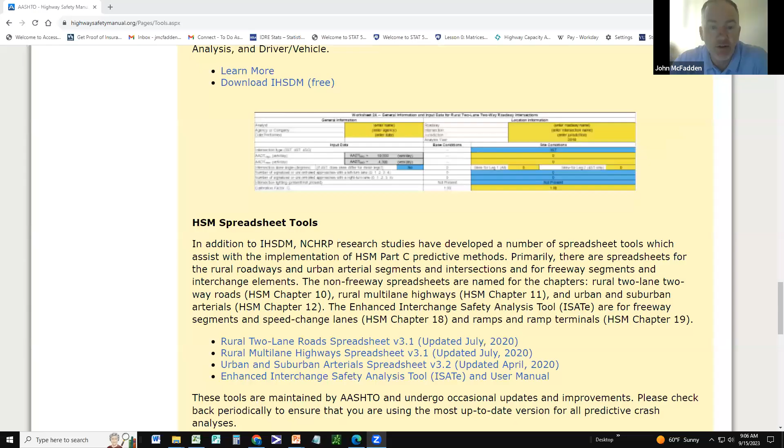If you recall yesterday, I went to the highwaysafetymanual.org website, and under tools, you'll end up at this location where we see Part A of the HSM, which is more or less an introduction into highway safety - the idea of traffic crashes being random events that are a result of system failures between the driver, vehicle, and roadway factors, basically setting the groundwork for why there's the need for a tool that estimates the interrelationship that exists between geometric design decisions or treatments that we put in the roadway, and the corresponding effect of those decisions on crash risk. Then we get to Part B, as I mentioned yesterday, which involves the roadway safety management process.

In the Highway Safety Manual, as part of it, they reference a few different resources. The first is AASHTOWare Safety Analyst. This was a pooled fund study, an NCHRP study that developed a software tool to help with network screening, diagnosis, countermeasure selection, economic appraisal, priority, and evaluation of those countermeasures. It is not the only tool that exists. Many states have adopted their own tool to deliver the HSIP process and help with that delivery. There's a handful of states, let's say 5 to 10, that participated in this and developed this Safety Analyst.

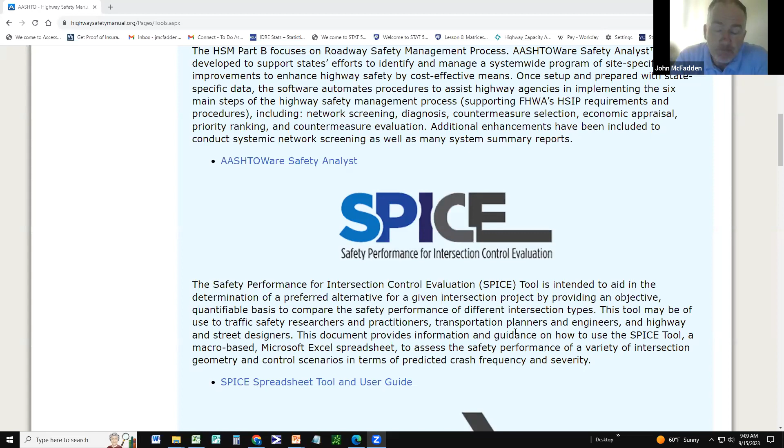So you'll see a couple other tools under this Part B roadway safety management process. We have the SPICE tool and CAP-X. SPICE is for intersection control evaluation, examining the safety performance. CAP-X is the capacity analysis for junctions, so it's relative to what we're talking about in the context of this workshop. VDOT has a junction screening tool called VJuST that's also shown on the site.

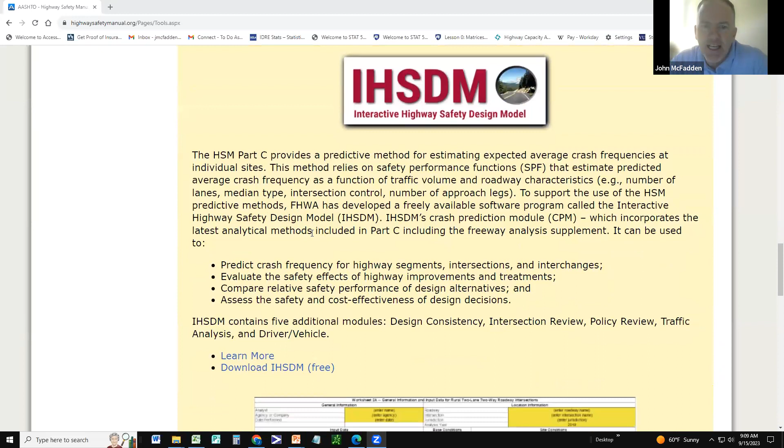But that is the Part B component to the Highway Safety Manual. We are focused on Part C, the predictive methods. As part of that, you'll see IHSDM at the top on the highwaysafetymanual.org site, and additionally we have the spreadsheet tool.

So today we're going to talk about, for freeway analysis, the Enhanced Interchange Safety Analysis Tool, or ISAT-E. And if you have the ability and didn't do it yesterday, this is an opportunity. If you click on that link there, it'll take you and deliver...

When you download it, 2 files: one is the Excel spreadsheet, the other is the ISAT-E user manual. And if you were to open up that user manual, you would see this is kind of the instruction set for how to apply DDSA to a freeway ramp or ramp junction using the NCHRP 17-45 methodologies.

And it does a pretty good job at teeing this up. In fact, when we deliver this workshop in person, we walk through step by step each of the data elements necessary for the delivery of a predictive analysis on a freeway ramp or ramp junction, and maybe even more importantly, the implication of when and where it's appropriate versus when and where...

There's some limitations with this methodology. So I love the fact that there's a kind of set of instructions, even though if I ever went and bought a piece of furniture at IKEA, the first thing I do is throw the instructions out and just try and put the thing together. And about an hour or two later, after frustrating myself, I'll go back and look for the instructions. So part of me thinks sometimes the best way for me to learn is to just jump in and play around with the software and get lost and make mistakes. And then I'll come back once I become frustrated enough to the instructions and actually walk through in a systematic fashion.

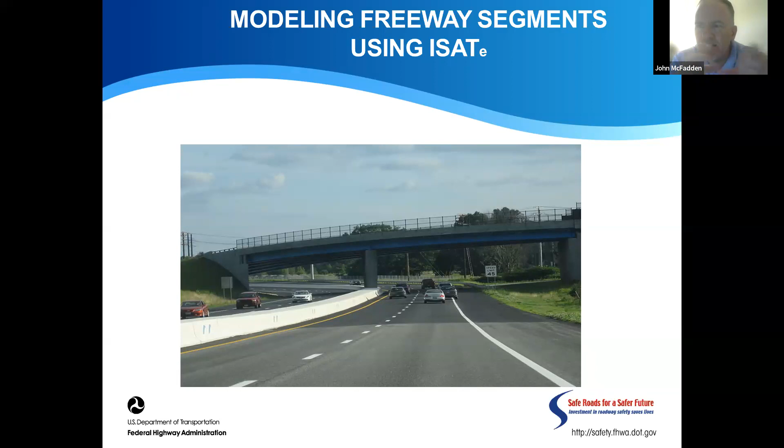So there are 2 other PowerPoint files that I would typically go through, the freeway ramps and ramp junctions. These 2 PowerPoints will also be emailed to you later today. And hopefully I can get through some of them, but I'll go as far as I can with respect to ISAT-E. I do believe, though, once you see how we apply this to freeway segments, you'll start to understand conceptually the logic of ISAT-E, and when switching over to ramps or ramp junctions, it's not going to be as much of a challenge because you're just going to be applying the same type of logic here.

So what we want to do this morning is describe the modeling steps, describe segmentation and how to do good segmentation, and then examine the data inputs necessary to do data-driven safety analysis using the Highway Safety Manual on freeway segments.

So I showed you the ISAT-E user manual, and yesterday I also showed you the NCHRP 17-45 final report. Those 2 references in combination with the Excel spreadsheet can all be downloaded for free and basically allow us, regardless of whether we own the Highway Safety Manual or not, to apply the concepts of data-driven safety analysis using the methodologies within the highway safety manual.

And basically deliver an analysis that we can make a more informed investment decision about our project.

So we showed this slide yesterday, and I had mentioned the idea of what we're doing with the HSM predictive methods. We are basically taking samples from states on roadways of different functional facility or functional classes or facility types, and producing a model that is an estimate of a population parameter for prediction of crashes using different predictor variables.

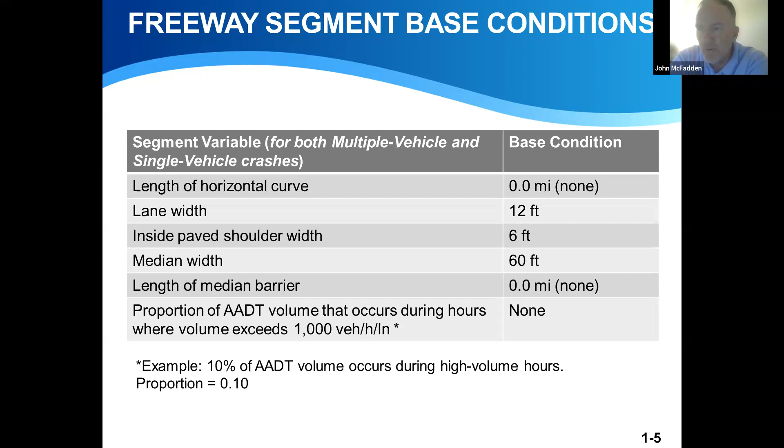Okay, for ramp entrance and exits, the base conditions are shown here: horizontal tangent, 12-foot lane widths, inside shoulder width of 6 feet, median width 60 feet, no barrier, and the proportion of AADT volume that occurs during hours where volume exceeds 1,000 vehicles per hour per lane is not occurring. So we are in an uncongested scenario.

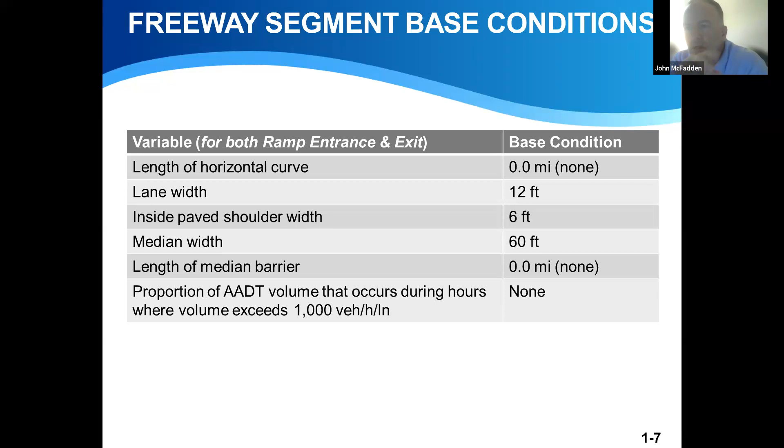And we know under certain scenarios there may be overlap, meaning if I'm dealing with a horizontal curve, lane and shoulder width may have some influence or overlap. If I correct for a horizontal curve and I widen the shoulder and lane width around a horizontal curve, the CMFs associated with that, if we didn't control, could double count. What they're indicating in the research is that they did calibrate this so that they work in combination to be compliant with that assumption of independence.

Let me scroll out. Hey Gary, I see you wrote a question here. In one of the analyses we recently reviewed, had a minimum speed limit on the ramp section set to 50 miles an hour, but our project had a speed limit of 35. Is the speed limit range hard-coded? Thank you, it's a good question.

Speed, in terms of the Highway Safety Manual, is incorporated into a couple of the facility types as a direct predictor variable, but not many. You may ask, well, how can this not be? It comes up a lot when delivering this training. How do we not incorporate speed into this analysis for some of the methodologies? The short answer is, when they ran the models, the data tells us what the data tells us. So they put speed limit in there, and it just didn't rise to the level of statistical significance to be included in the model.

I'll speak parenthetically here. If you look generally at other research examining speed as it relates to predicting or explaining crash variability, speed itself, or speed limit, as far as I know, hasn't been highly correlated or found to be a statistically significant predictor in explaining crash variability. But variability in speed was found in research to be correlated with crash risk. So it's not so much the speed itself, but variability in speed.

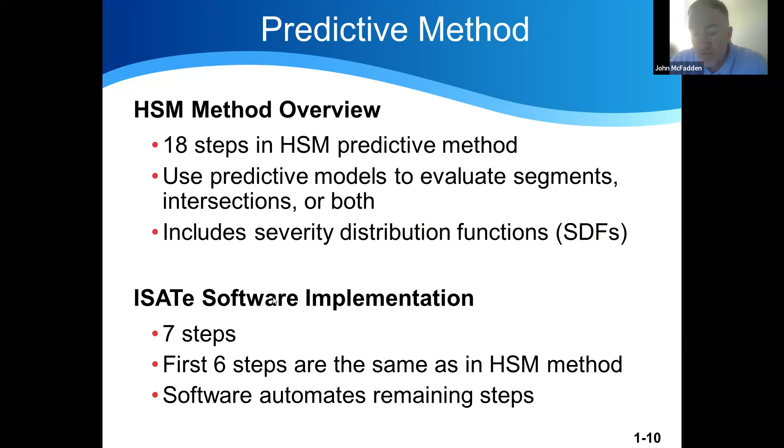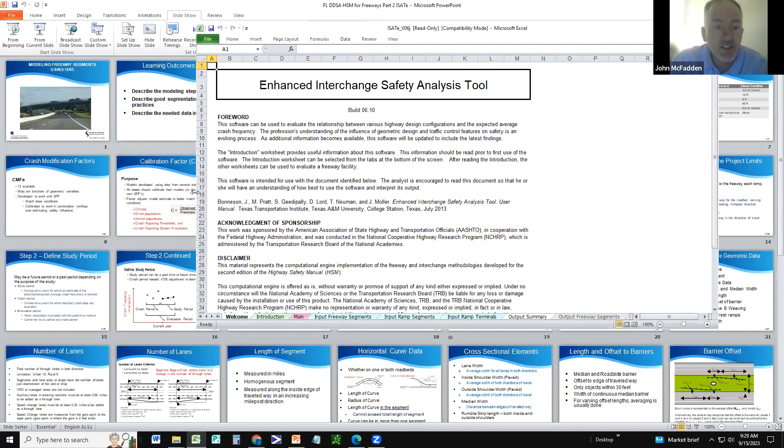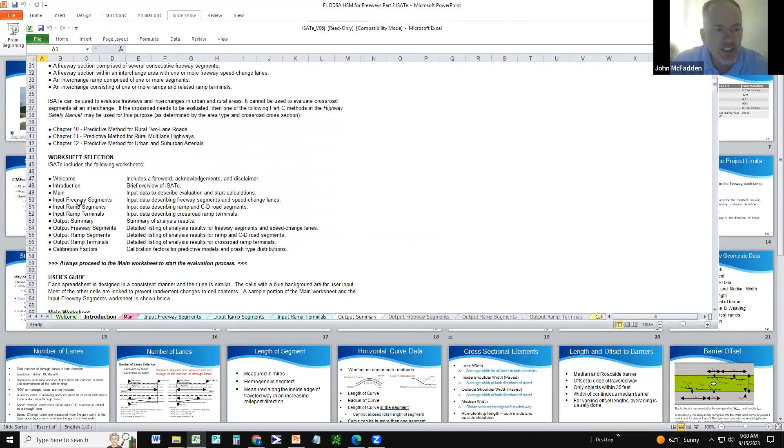Across the bottom of the ISATe spreadsheet you see the different tabs. I'm at the welcome tab, and I'm going to scroll over and click on the introduction tab. Here they walk you through the Highway Safety Manual philosophical approach, the methodologies, the facility types that can be used, worksheet selection, and so on, giving you an intro into ISATe and the different data elements and pull-down menus.

The other thing I want to share is this tab, the input for freeway segments. Before that, you have the main tab that gives your specific project descriptive elements, which you plug in regardless of what facility type you're looking at. Today we'll focus, initially, on freeway segments. Let me come back now to the script.

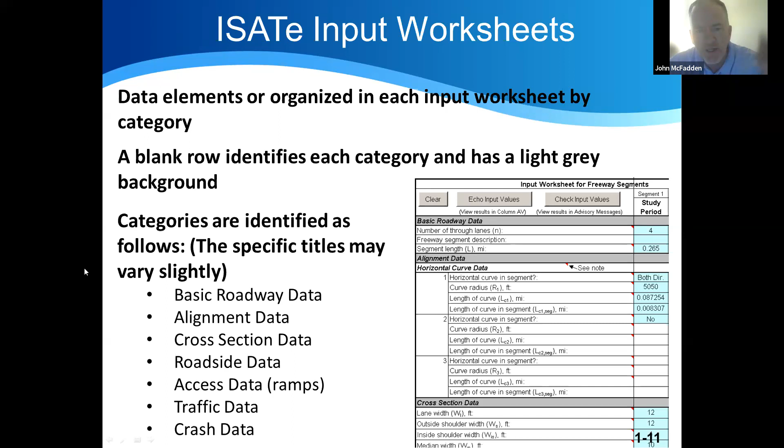Now what you see on this slide is a cut and paste image of the input worksheet for freeway segments. As shown on the bulleted list, it starts with your basic roadway data, then asks specific questions about the context of your facility, number of through lanes, segment length, then alignment data, cross-sectional data. As you scroll down you'll go through each bulleted item: roadside, access, traffic, and crash.

The 7 steps involved in this process: first we define the project limits, then the study period. We need to acquire traffic volumes and crash data. I should preface this discussion - there are critical data elements necessary to run these models. You can get away without a complete inventory of data for your project; you can make some assumptions, but they're rooted in the primary data variables necessary to run this.

If you don't have traffic volumes, there really is very little you can do, because the foundation of these models in the SPFs involves traffic exposure, traffic volume, and segment length. The other geometric variables are also crucial for each of the CMFs associated with those elements.

So capturing traffic volumes and crash data is critical; geometric and traffic control data is critical; and dividing the project into individual sites, which by definition is segmentation, is also critical for our analysis. Once we've done that, we can take our observed crash data and assign it to those individual sites or segments we created. Once we've put all this into the Excel spreadsheet, we can run the analysis and get the results.

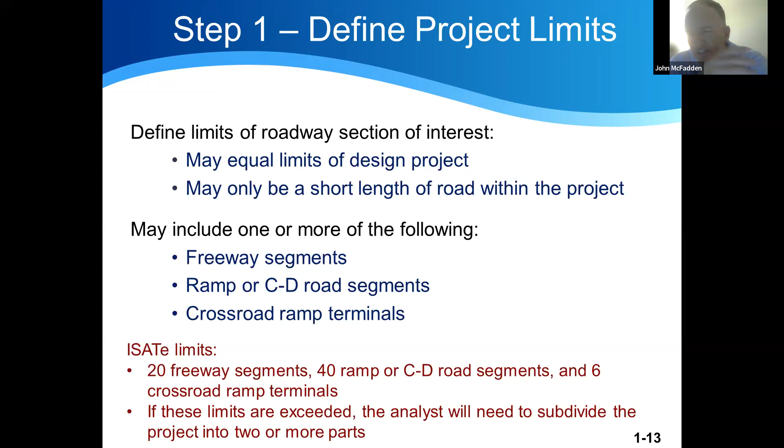You may be interested in just the freeway segments, just a ramp or CD road, or just a ramp terminal, or you may be interested in the full project that includes all three or some parts of all three. If your project is large enough, let's talk about the boundary or limit of ISATe. The limit of analysis that ISATe can do in any one file is 20 freeway segments, 40 ramp or CD road segments, and 6 crossroad ramp terminals. If you exceed that, you'll have to separate it into multiple files.

Okay, now again, setting this up, defining the project limits. First, we need to establish a reference line for the freeway, for each ramp, and for the CD road. For freeway segments, typically what's used is the inside edge of the traveled way for the roadbed serving traffic moving in the increasing milepost direction. For ramps and CD roads, we use the right edge of travel way in the direction of travel.

Okay, defining the study period. The study period may be a future period or a past period, depending on the purpose of the study. These are consecutive years for which an estimate of the predicted and expected crash average frequencies is desired. Our crash period are the consecutive years for which reported crash data are available. The evaluation period are the years separately evaluated with the predictive method, and this combines both the study period as well as the crash period. This language is embedded in the HSM and in the NCHRP 17-45, and it's important to be aware of these three time periods we are using in the analysis: study, crash, and evaluation.

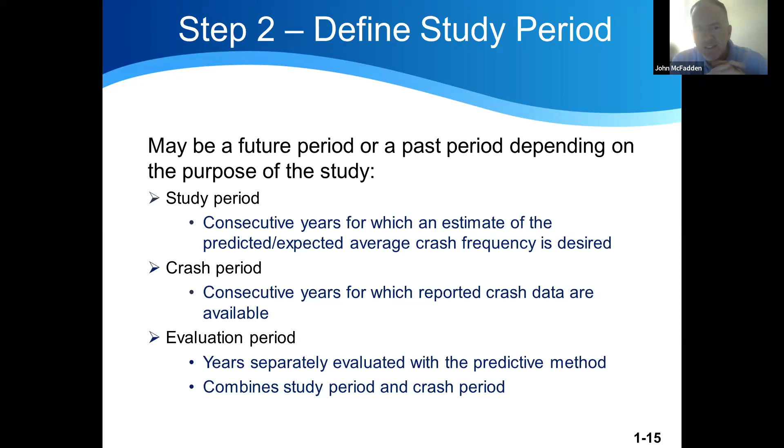Let's see, is there a question here? Oh, okay.

Moving forward, now we're building this house of how to do this analysis. Let's get into the data requirements. These are the traffic volume and observed crash data. All of the volumes are AADT, in vehicles per day. The mainline AADT for each segment, this is bidirectional, or both directions of travel, is required. So too are the upstream entrance ramp AADT and the downstream exit ramp AADT. We also, based on that CMF on high volume proportion, need to identify the proportion of AADT volume that occurs during hours where volume exceeds 1,000 vehicles per hour per lane.

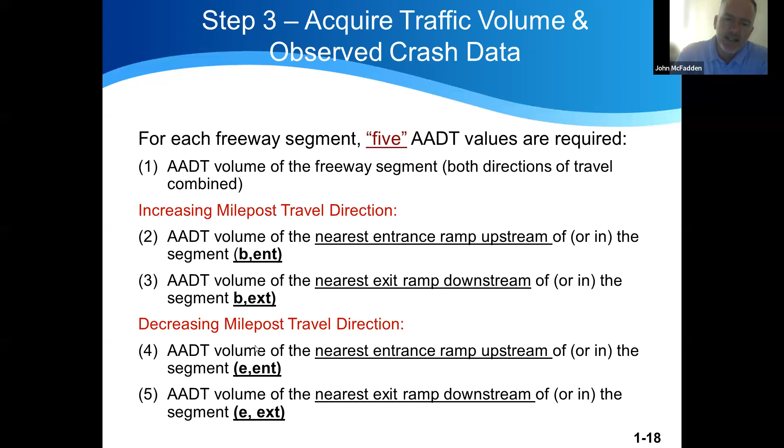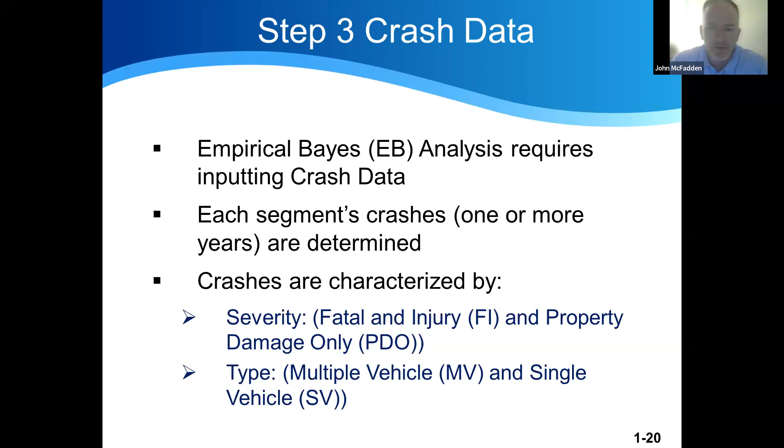Okay, walking through each of these individually, starting with number of lanes. These are the total number of through lanes in both directions. So the models are able to handle as many as, in an urban context, 10 total lanes. In a rural context, 8 total lanes.

A question that often comes up: what if I have 12 or 14 lanes? Then you would be extrapolating outside the bounds of the model. And as I mentioned before, it's hard enough if we do everything as the model intended, so misapplication or extrapolation beyond the intended bounds of the model is not recommended.

Let's continue here. Segments with lane adds or drops have the number of lanes just downstream of the add or drop. We do not incorporate HOV or managed lanes into this methodology in its current form.

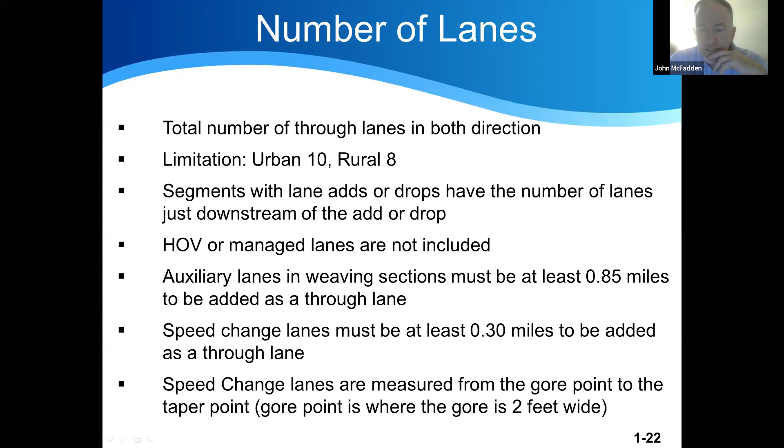Auxiliary lanes in weaving sections have to be at least 0.85 miles to be added as a through lane. And then speed change lanes have to be at least 0.3 miles to be added as a through lane. These speed change lanes are measured from the gore point to the taper point, and that gore point is where the gore is 2 feet wide.

Okay, now length of the segment. This is measured in miles. We're focused on homogeneous segments, so in cases where something changes that directly impacts the prediction, we have to subdivide into a separate section or segment. And it's measured along the inside edge of the traveled way in an increasing milepost direction.

Oops, we got a couple questions here. John, that high volume proportion, I believe it's just for the main line, and I'll confirm that. Derek's going to be here next week to help with the IHSDM. I'm pretty sure that high volume proportion is just for the main line.

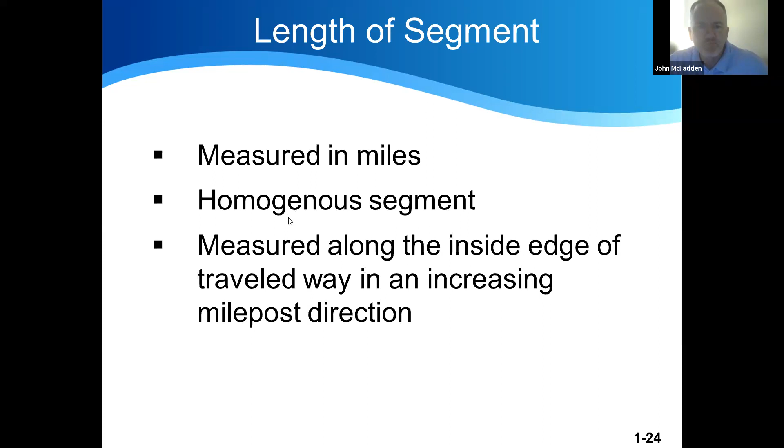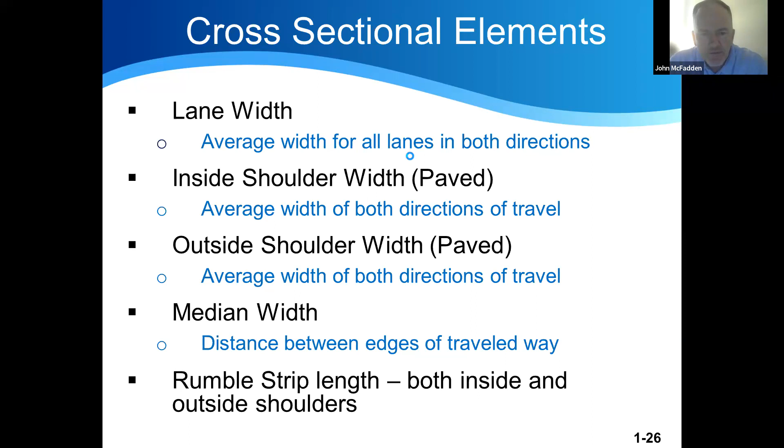Here is an example for barrier offsets. Each piece here is represented by its average offset, W sub off comma IN sub I, and length L sub IB sub I. We could alternatively recognize that the offset is the same for pieces 1 and 4, and 2 and 3. So each pair can be combined by adding the two lengths, L sub IB1, L sub IB4, and using the common offset length. You can average these things out and it will yield the same result. By simplifying it, it alleviates some of the data entry elements.

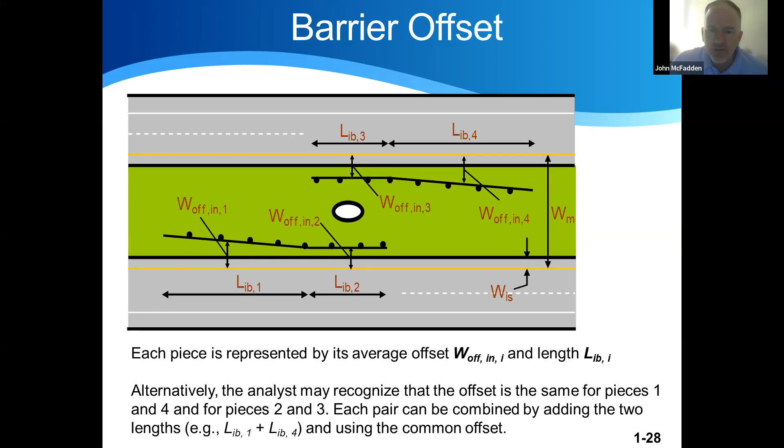We had mentioned type B weaving a few times - let's get into that for a moment. What are the characteristics of type B weaves? One of two weaving movements can be made without any lane change. The other movement requires at most one lane change. And then both exit and entrance ramps are on the right side of the freeway.

So how do we measure this length? It is from the gore point of the entrance ramp to the gore point of the exit ramp. If that length exceeds 0.85 miles or 4,500 feet, we do not consider this a weaving section - it becomes a lane add or a lane drop.

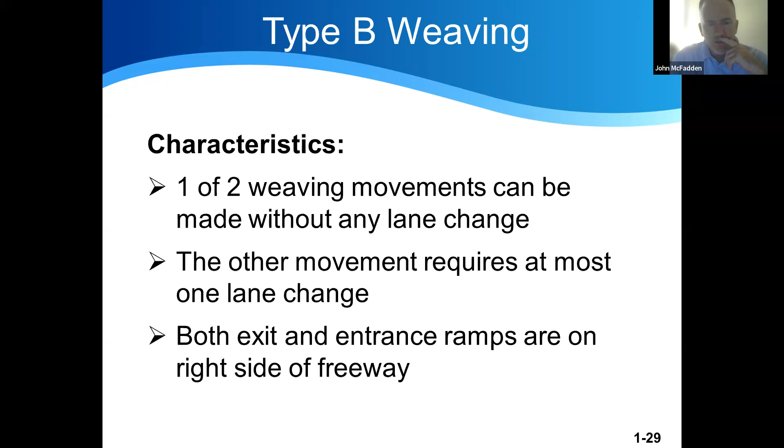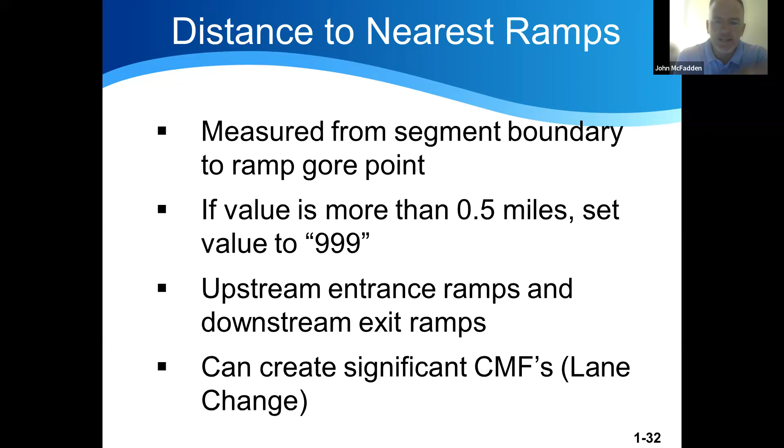Now we'll get into calculating the distance to the nearest ramps. These are measured from the segment boundary to the ramp gore point. If the value is greater than a half mile, we just code it as 999 - no impact on safety. The upstream entrance and downstream exit ramps are the ramps of interest, and this can create significant CMFs for lane change.

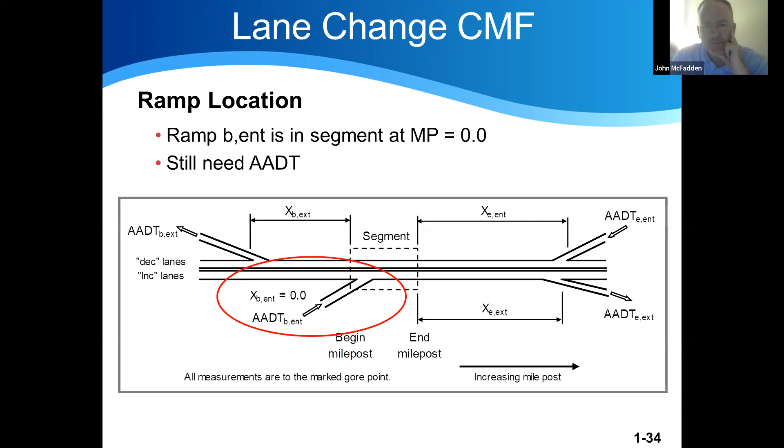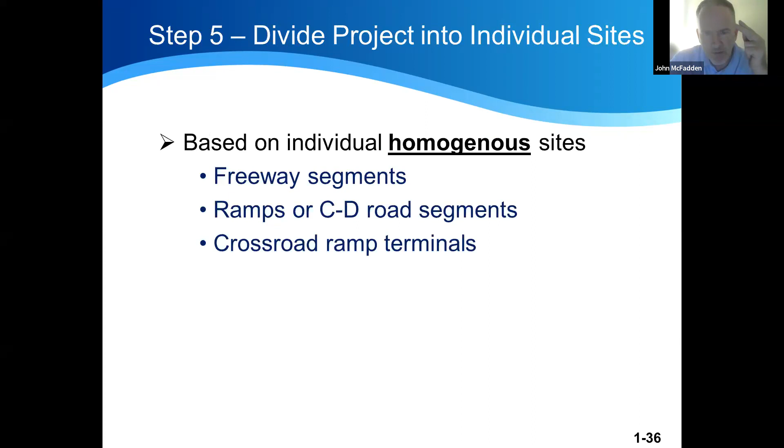Now step 5, we divide the project into individual sites. We're focused here on homogeneous segments, and these are based on freeway segments, ramps or CD road segments, or crossroad ramp terminals. This is critical for the proper analysis to be conducted. So when do we separate or subdivide our project into multiple segments?

Anytime we see a change in the following characteristics: traffic volume, number of lanes, lane width, shoulder width, median width, clear zone width. And what this should connect with you is the idea that these are directly linked to the predictor variables for CMFs.

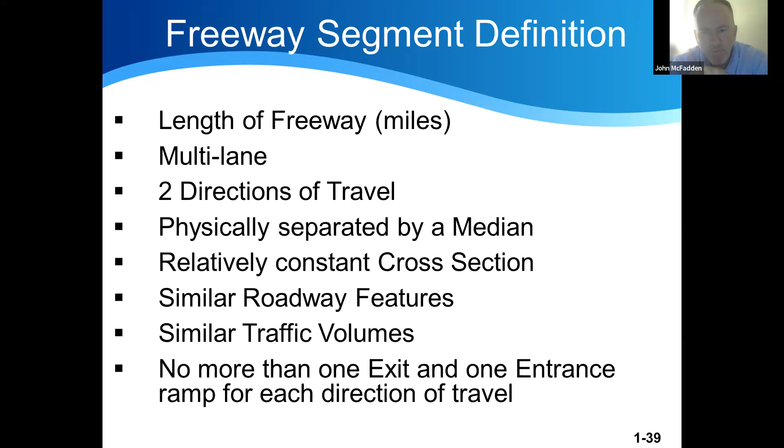So in setting up your analysis project, one of the key elements is defining the segments as a result of segmentation. Here we have an illustrative example of the segmentation process for a freeway speed change lane. You can see the ramp entrance length, the taper point shown, the gore point shown, and for the exit ramp with taper design, the ramp exit length, the gore point.

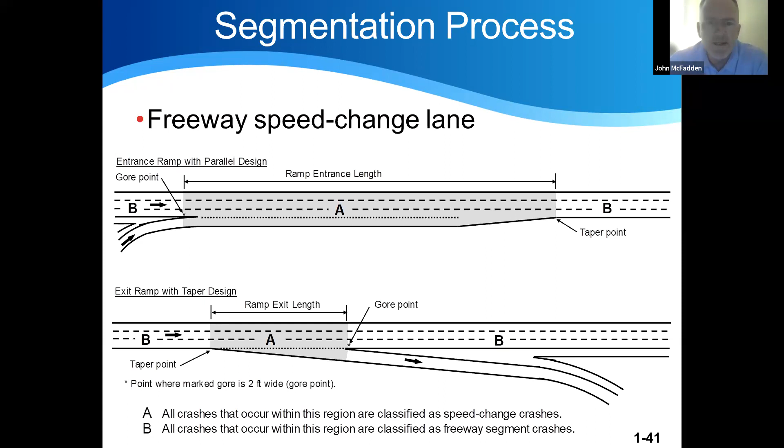When we start our segmentation and establish it throughout our project, then we're going to come back and look at the geospatial information related to our crash occurrences - the observed crash history - and place those accordingly in the different segments. Based on the type of segment we're dealing with, there are different models that will be used to predict those crashes.

I mentioned that you need geospatial data related to your crash data in order to be able to allocate the crashes at the specific locations within the segments that we've created. This can be a problem if you don't have that. If you just have the total crashes over the project limits, then we would have to basically use project level EB as compared to this site specific approach.

If you don't have the exact location of the crashes, then we're just allocating the crashes across the entire project. So that's site specific - crash information is not adequate to locate the crashes accurately within the segment.

For project level, the EB method, if many segments are short, conceptually relocate features defining segment boundaries to produce longer segments and the predictive model estimate alone. In this case, we are unable to do the EB for that project level because we cannot differentiate. So there are cases where the EB is either going to be a challenge or we have to make broad assumptions about the distribution of those crashes across the project limits, based on the level of location data related to the crashes that we have.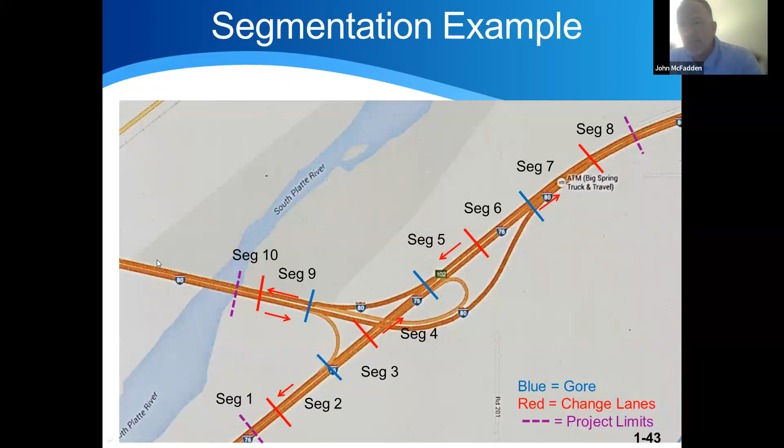With that segmentation, you've created a new analysis segment that requires the data to be input separately for each of those segments. I cannot impress upon you enough the idea of segmentation and its role in the prediction. There's a level of precision needed or required for us to get some sort of accurate representation of the results. A key to that for freeway analysis is the segmentation process.

So in reviewing this, one of the key elements here are project boundaries, segments, timeframes, the CMFs, the data inputs that we use, ADTs, lane change, speed change lanes, curves and barriers - that kind of captures modeling for the freeway segments.

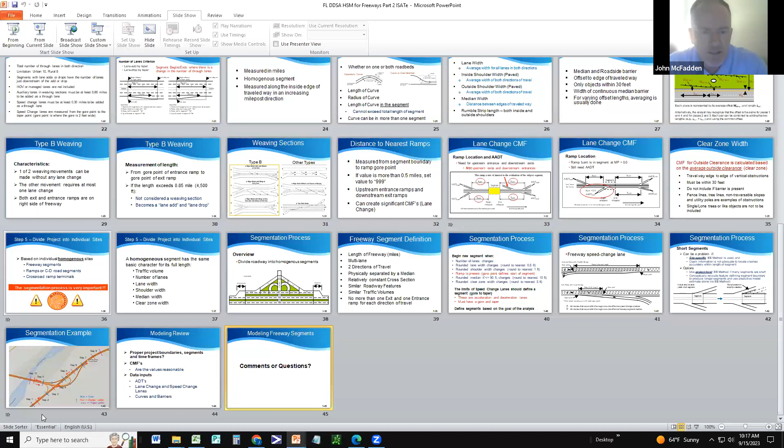So I want to just segue back to the spreadsheet for a moment and illustrate what this would look like. At this point in person, what we would end up doing now is a group project where we take - and I give you the example of I-76, and we've inputted into ISAT-E to run an analysis. I just kept the information from the downloaded file, and I want to share with you.

Initially, when you start off a new project here - and this is just the sample project - the first thing you're going to do under the main tab is establish the general information for the project. Then you're going to run through and identify the first and last year of analysis, and then the first and last year of crash data that you have available.

And then you can segue or identify, do we have data for this site? So we either don't have crash data for all segments combined, meaning we're basically distributing those crashes uniformly across the entire project because we don't have good geospatial data. Or we may have data for each individual section or segment available, where that geospatial location information related to crash history is available, and we can apply it to the different segments we created.

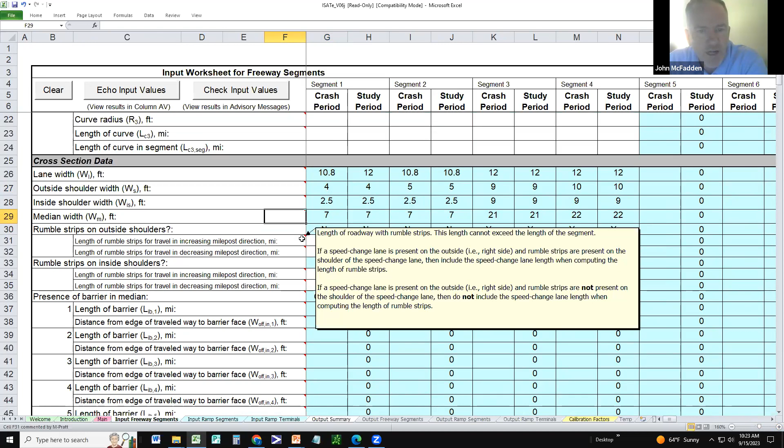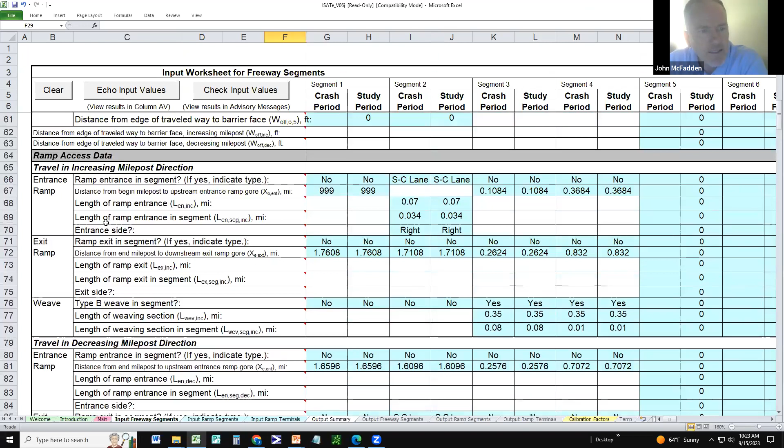Let me continue, make this a little larger here - maybe difficult to see. As I scroll down, you can see lane width, outside to inside shoulder, median width. Again here for median, click on the red triangle and it gives you more detailed information - rumble strips, inside and outside shoulders, median barriers, and the idea of the length of the median barrier. Roadside data, presence of barrier, ramp data, and increasing versus decreasing milepost direction, and then your traffic data.

Also the proportion of ADT in the average 24-hour day where the hourly volume exceeds 1,000 vehicles per hour per lane. So that lane volume per hour - the equation is captured there, where the volume during hour I, and N is the number of through lanes. You do that for each direction, increasing and decreasing milepost, you put the ADTs in. And if you just put one value, it will run that value continuously.

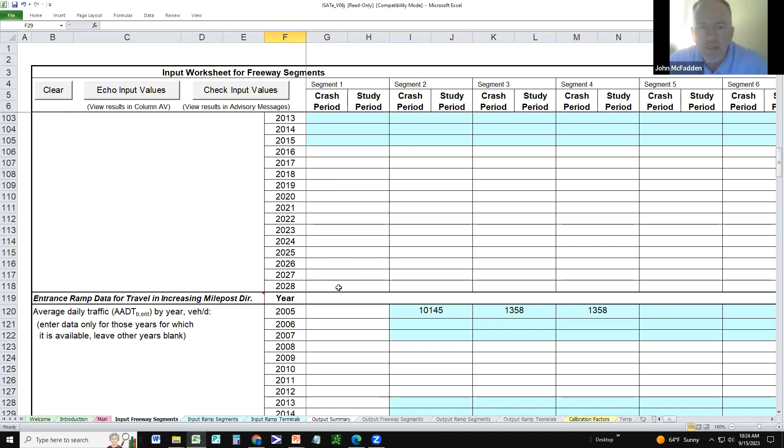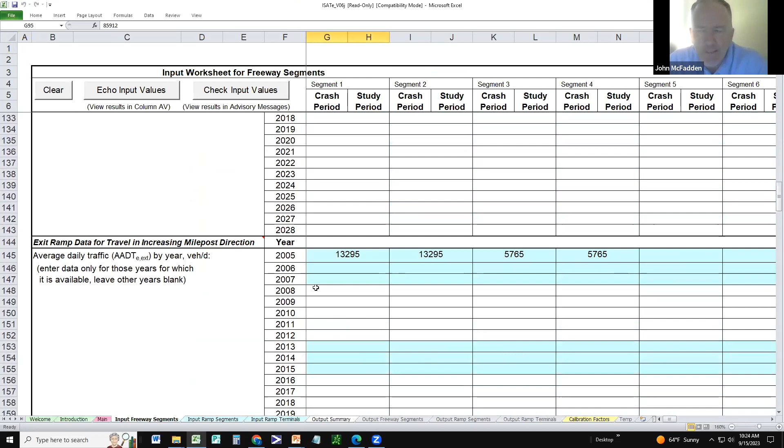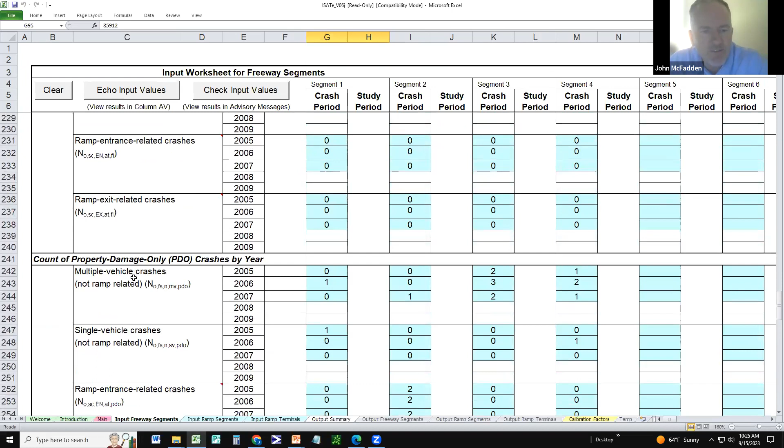If you put a value like 85,912 for 2005 and then 2028 - well, I should also go back. We've established our first and last year of analysis, or of crash data, and the first and last year of analysis, 2013 to 2015. So when we put in our traffic volume data, we have 2005 data, it will pull from that data and use it accordingly in the predictions if that's the only crash or volume data you provided. Scrolling down, there's the crash data again for the time period, broken down by multi-vehicle, single vehicle, ramp entrance, ramp exit, multi-vehicle, single vehicle, and this is fatal and injury versus PDO, and then any advisory messages.

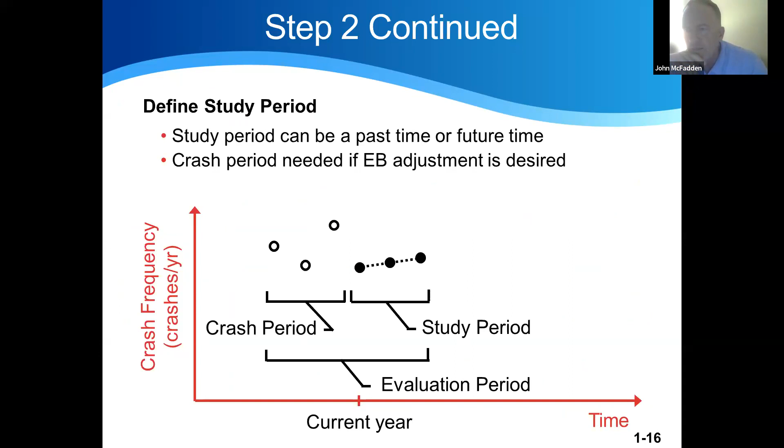So let me segue back for a moment to the very beginning of this presentation where we looked at - I want to go to this slide. Recall, we have the crash period, the study period, and then the evaluation period. For this, our crash period in Excel is 2005 to 2007. Our study period per the main tab is 2013 to 2015. So from this, our evaluation period is going to be 2005 to 2015, covering the full width of that range from the crash period to the study period.

Okay, and then very simply, once I input all this data into this freeway segment spreadsheet, I can come back into the main and perform calculations. If I click on that, it'll run the numbers, and then you can go to the output for the freeway segments, and it will provide you the CMFs.

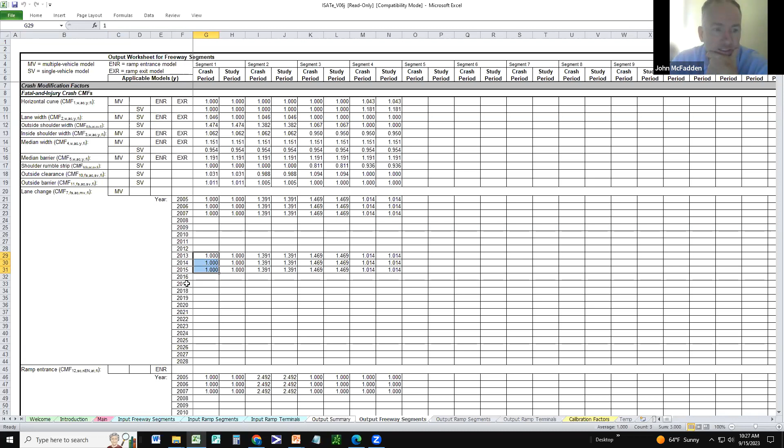For the output and the crash predictions for your model, you can see the 2005 to 2007 crash data, the crash period, and then the study period, 2013 to 2015. And the output summary then will provide us total number of crashes. This is where you will pull from. Let me zoom in a bit here so you get a better view of this.

So under the output summary tab, it provides you the estimated number of crashes during the study period, and the estimated average crash frequency and crashes per year during the study period. What's the difference here? The study period encompasses 3 years, so that's spitting out 120 crashes in 3 years, and then they break it down by year, as well as across the KABCO scale - so how many fatal, injury A, B, C, and PDOs.

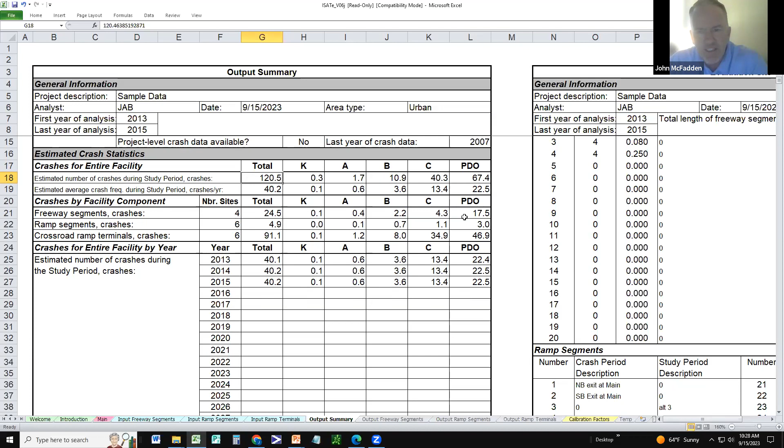And you've got it broken down. We didn't get the ramps or ramp terminals yet, but the first part is just the segments themselves and the predictions. So that is a quick hitter on the segments.

Let's take a look now at the ramps. I share the sentiment that this workshop, again, is a Cliff Notes. We're not getting the level of detail that you would if we deliver this in person over multiple days. It's just the nature of the content, especially for freeways, ramps, and ramp junctions. There are more data elements in this methodology than the other three combined - and when I say the other three, 2-lane rurals, multi-lane rural, and urban suburban.

Okay, so in this case, let's start to explore how we can model and predict crashes on ramps. As a part of this session, we'll look at the different types of ramps that the HSM can analyze and predict crashes for. We'll again show segmentation for those ramps, the data elements necessary, and then describe the depth and detail of the results.

Okay, so the ramp types that we're able to analyze here are service ramps - exit, which end at a crossroad, entrance starting at the crossroad, CD roads and ramps within the interchange, and then connector ramps where you have freeway to freeway system interchange ramps.

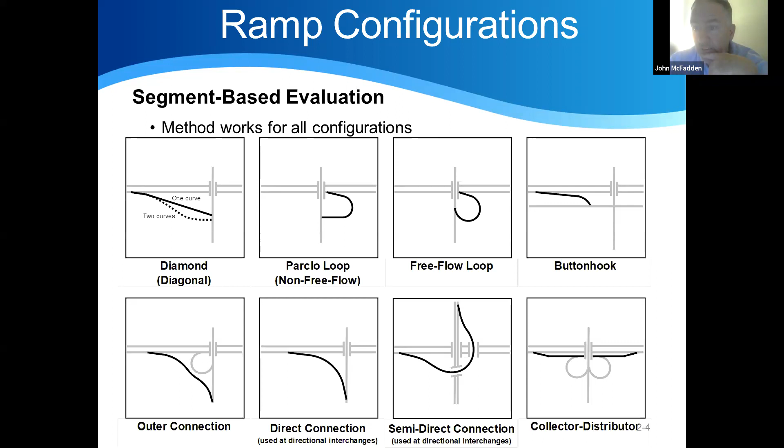So we also again predict for multi-vehicle versus single vehicle crashes, and then for fatal and injury versus PDO.

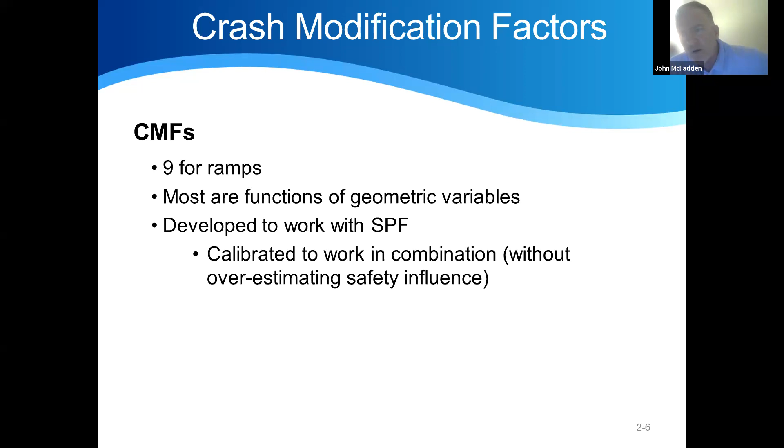Okay, the CMFs for ramps, these are mostly geometric in nature. And again, the data that were used to calculate the SPFs - so those crash and ADT and segment length data used to develop the SPFs, the same sites were used to develop the CMFs for this. And again, that will be called adjustment factors in the second edition.

Our input data includes number of lanes, the length of the segment, horizontal curve data, the average off-peak freeway speed, our lane and shoulder width - and this is for paved lane widths and shoulder widths - the length and offset of the barrier, the presence of weaving for CD roads, type of traffic control at the ramp terminal, the traffic volumes, and then crash data if we're going to use EB.

I should mention, I talked about this before: to run these models, if you don't have ADT data, it can't be done. But if you have ADT data and you don't have crash data, you can still run the predictive side. If you don't have all of the CMF related data, you can make assumptions. Meaning...

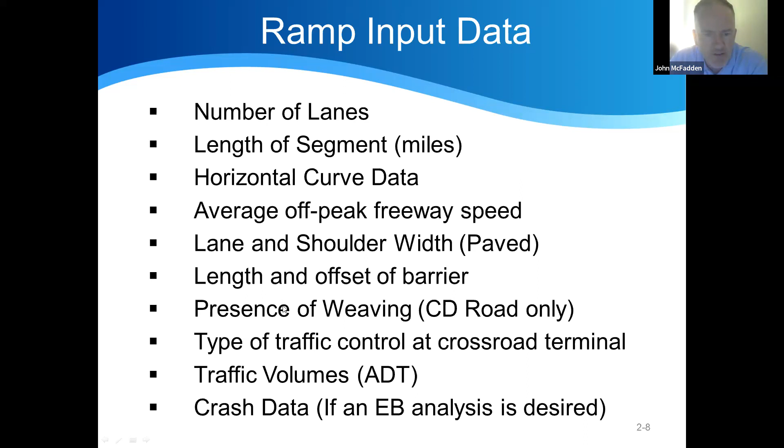Okay, the input data: number of lanes, length, horizontal curve, off-peak freeway speeds, lane and shoulder width - I covered this already - length and offset of the barrier, presence of weaving, CD road, type of traffic control, volumes, crash data. Okay, looking at the number of lanes - total number of through lanes on the ramp segment. And this visual kind of captures that.

The segments with lane adds or drops have the same number of lanes just downstream of the add and drop, and the length is measured from the upstream taper point. Again, reiterate, the managed lanes or HOV lanes are not a part of this analysis methodology.

Auxiliary lanes that exist in weaving sections have to be at least 0.3 miles or 1,600 feet to be added as a ramp lane. Otherwise, we would code that as a lane add or lane drop. Speed change lanes associated with a second ramp, at least 0.19 miles or 1,000 feet, are added as a ramp lane. Otherwise, it's coded as a lane add, lane drop. And turn lanes at the ramp terminals are not included.

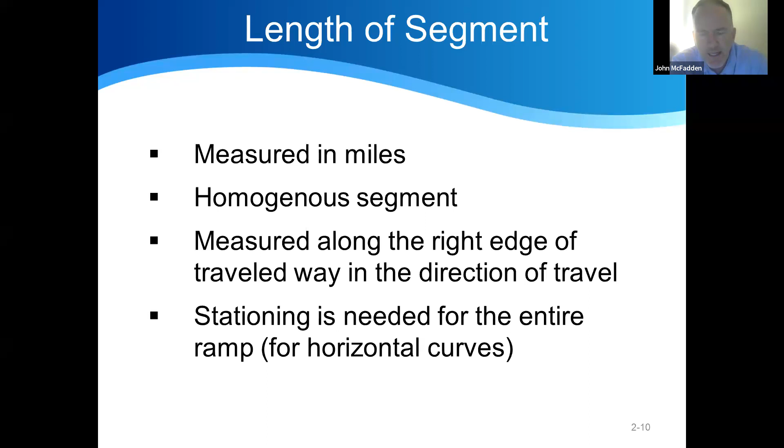It's the length of the segment, and this is again measured in miles. And we're looking again for homogeneous segments measured along the right edge of the traveled way in the direction of travel. And we need stationing for that entire ramp when dealing with horizontal curves.

So our horizontal curve data, this is needed for curves prior to or in the segment. And we have the need for the milepost at the beginning of the curve measured along the right edge of the traveled way. And our length of curve, if we're using spirals, we use an effective curve length. This is measured as the midway distance from the point of spiral TS, that's point of tangency for the spiral, to the point of curvature for the spiral, and from the reverse, the curve to spiral and spiral to tangent.

The radius of curve, length of curve in the segment, and this cannot exceed the total segment length. So by definition, the length of curve, if the curve captures the full length of the segment, then they're going to be the same. It cannot be greater. And this comes up, you'll get an error message, if you try and do that.

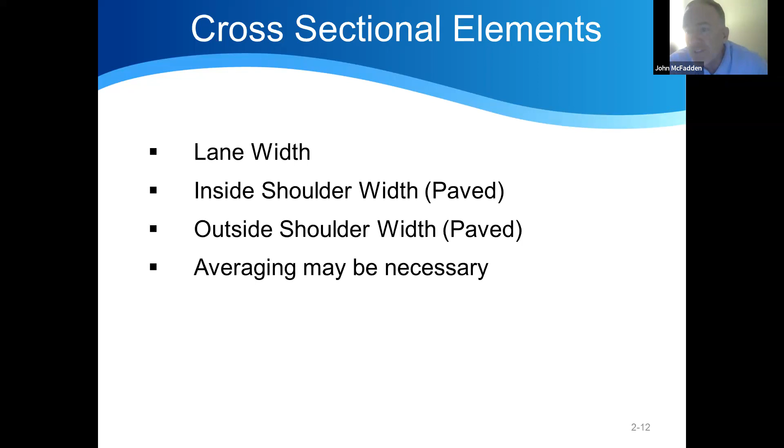So you can have one curve in multiple segments, which is captured in that last bullet. And then our cross-sectional elements, your lane width, your inside shoulder width, your outside shoulder width, and sometimes you have to average those values if they vary throughout the segment.

Length and offset to barriers, and this is for both sides of the ramp. Barrier offsets to the nearest edge of the traveled way, and we are only speaking about objects that are within 30 feet. If we have varying offset lengths, typically we just average.

You're getting a feel for, and one of the other things I mentioned about me and IKEA furniture, where I just jump in and try without any instruction to put this thing together.

I do like the idea when dealing with any of those Excel spreadsheets, doing sensitivity analysis, where you go in and you start adjusting and changing the variables one at a time to see which factors have a greater impact or influence on safety performance. And this is kind of how you start to develop some engineering judgment about those predictor variables that offer the most explanatory power for our crash prediction, or the greatest influence. And sometimes this process, it just takes time and experience of applying it over and over again.

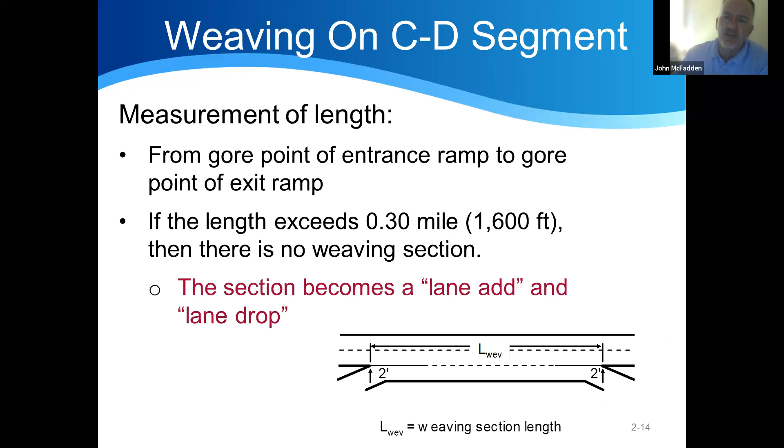So again, weaving on a CD segment, we measure the length from gore point of the entrance ramp to gore point of the exit ramp. If again, it exceeds 0.3 miles or 1,600 feet, we do not consider this a weaving section. That would then indicate or necessitate creation of a lane add or a lane drop.

Okay, definitions here. A ramp begins or ends at gore points. So a new segment is required if we see a change in the number of lanes, you have merging ramps or CD roads, diverging ramps or CD roads, or you have right or left shoulder width changes.

Now, you might say, John, you just contradicted yourself, because in a previous slide, you told me to average any altering shoulder width conditions. Well, in that case, when we get beyond or exceed the 5 foot average, that would basically pivot us or put us into a different CMF category. At that point, then it would necessitate segmentation.

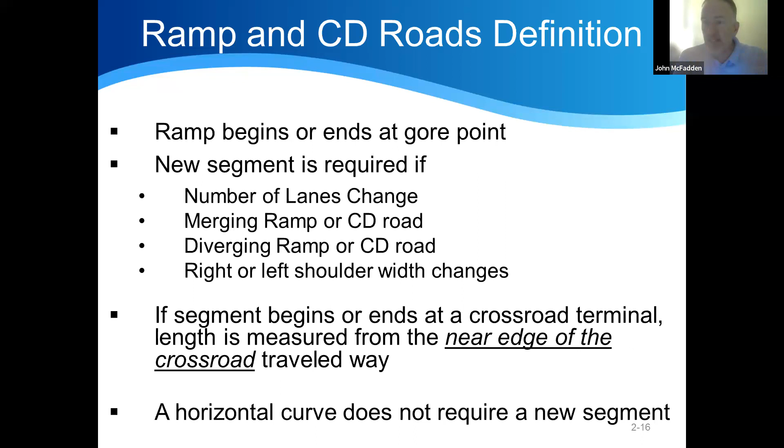Okay, here's an example for horizontal curve. The curve location, our ramp mile distance along the ramp to the start of the curve. So then we establish 1 milepost 0.0 for all segments on the ramp, and 1 milepost 0.0 for all ramps with a common ramp entrance or exit location.

Then the curve data are entered in progression based on the direction of travel. So you can see we have this common ramp entrance we establish at that gore point. This for this exit ramp, 0.0 for both ramps that exist when you have multiple ramps at this location. And then we have the beginning point for the curve alignment as well.

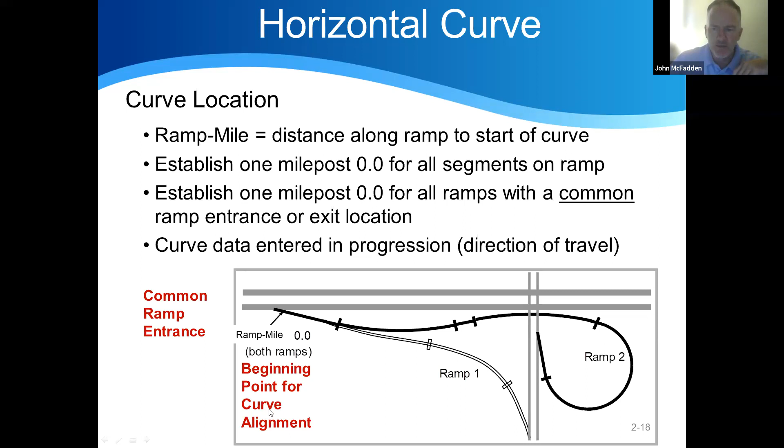So for this, here in a special case, we have 2 ramp mile zeros for the case where we have 2 ramps combined. So the goal is to estimate the average curve entry speed on these segments. For these segments, use ramp mile 0 of the higher volume ramp. So the higher volume ramp will dictate. So ramp 1 here has the highest volume, so its milepost 0.0 is used for the combined entrance ramp segments. And you can see these are 2 separate entrance ramps.

Okay, so for off-segment curves, these are the curve location here. We need data for all curves located prior to the ramp segment. So ramps with 2 or more segments, the prior segment curves will be off segment, and then the curve data entered in the progression direction of travel, for instance, here. So with this, you see changes from 1 lane to 2 lanes, and we may have this off segment curve that exists upstream in segment 1 of segment 2.

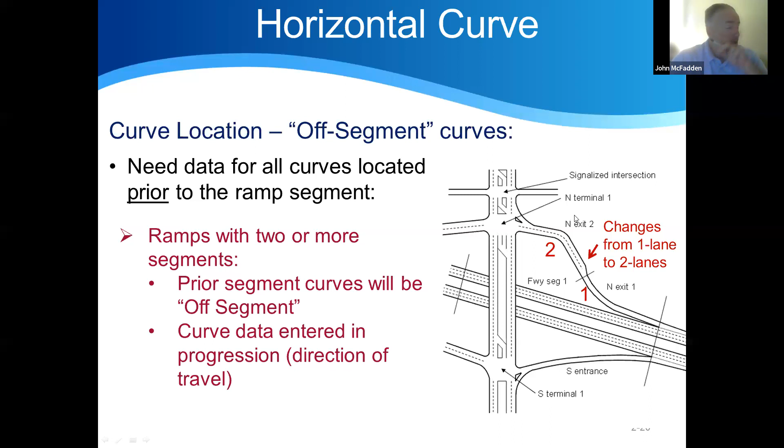Excuse me. Sorry about that.

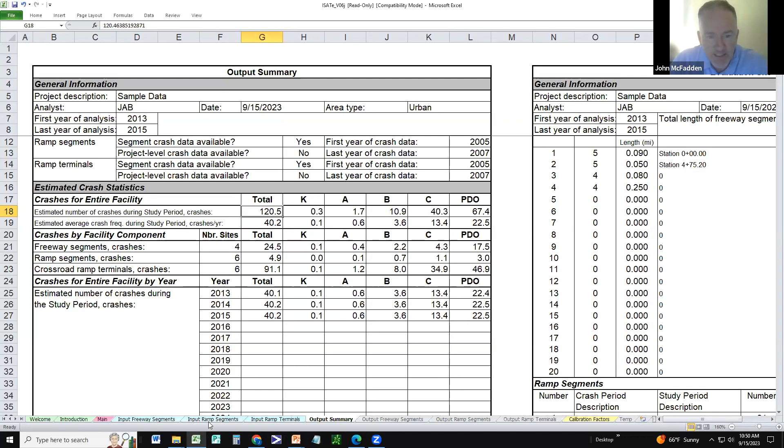All right, so let me segue for a moment here back to the spreadsheet to illustrate where this falls. So the next tab over from our freeway segments is, if I can show you here, make this a little bit smaller, you'll see here input ramp segment data. And from this, you can see for that same example, we have segment 1 through segment 6. And we've got our horizontal curve data in segment or off segment as identified here. And you go through systematically the same way we did for the freeway segments, the cross-sectional roadside, ramp access, traffic data, crash data, and then for the output, you can see the output for our ramp segments.

Scroll here. Oops. Do it here. Output for our ramp segments is shown here with our CMFs. And again, yesterday I touched on when and where to use ISAT-E versus IHSDM. One of the benefits of ISAT-E, it provides you the CMFs visually on this tab. IHSDM, it's more of a black box. You don't get to see some of how the sausage is made and the stats or the predictions are developed, but you do get to see that in the ISAT-E.

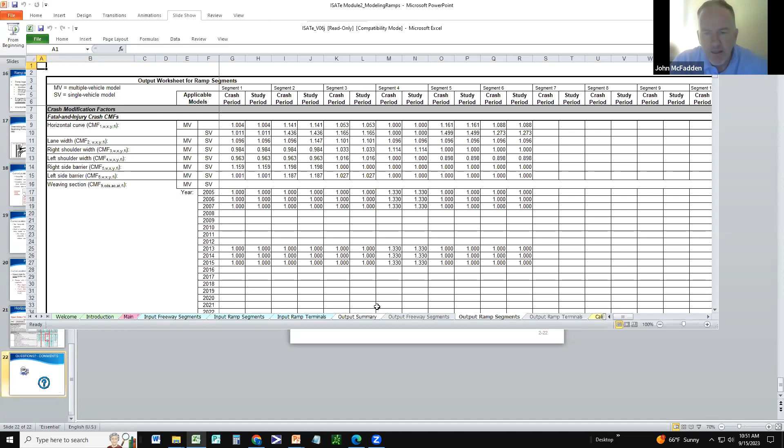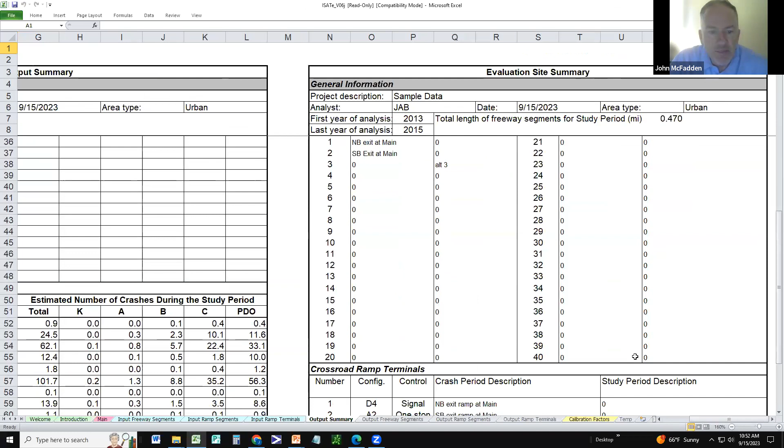And then if I go to the output summary, let me enlarge that, and you can see the total crashes for the entire facility. And as you scroll down, or excuse me, scroll across here. Hide this. You will be able to identify crashes across the different facility types. So, for instance, there's our ramp crash. We have the freeway segment crashes, the ramp crashes, and then the crossroad ramp terminal crashes.

So for that example that was put in there, we end up with 6 total sites with about 5 total crashes predicted for our ramps. You'll oftentimes, in an effort to capture kind of like a scale and magnitude, typically because your ramps comparatively to the segments are a shorter distance, the factor that has the greatest influence on the number of crashes predicted is ADT and the length, the exposure data. So that's why you're likely to see, when it comes down to crash predictions, that the ramps themselves comparatively will have fewer crashes because they represent a smaller proportion of the roadway mileage for our analysis segment.

All right, let me pause here. That gets us through ramps. Any comments or questions before we take our second break?

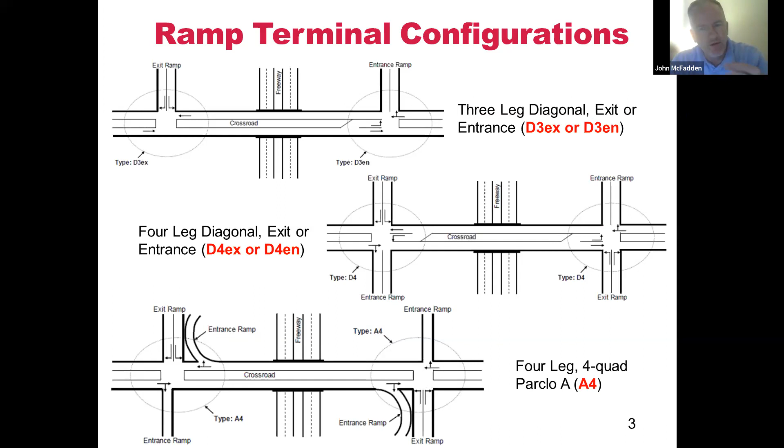So you capture these different configurations, and going back to what we talked about with ramps, the site you're working on and trying to predict—if it doesn't fit closely to one of these configurations, or isn't operating as one of these configurations would suggest, you're going to want to be cautious in running the analysis using these models.

Let's take a look at the safety performance functions for these different model configurations. The general model form is shown at the top, N sub SPF. It's an exponential function where your predictor variables are the ADT of the crossroad, the ADT of the exit ramp, and the ADT of the entrance ramp. For that crossroad ADT, it equals the ADT for the inside as well as the outside legs divided by 2. Our coefficients A through D will change based on configuration, the type of traffic control, the area type, the number of crossroad lanes, and the crash severity for which the model is predicting.

If the center lines of the two ramps are offset by 75 feet or less, they are considered one intersection. And if the two ramps are offset by more than 250 feet, then each ramp terminal is considered to form a separate intersection.

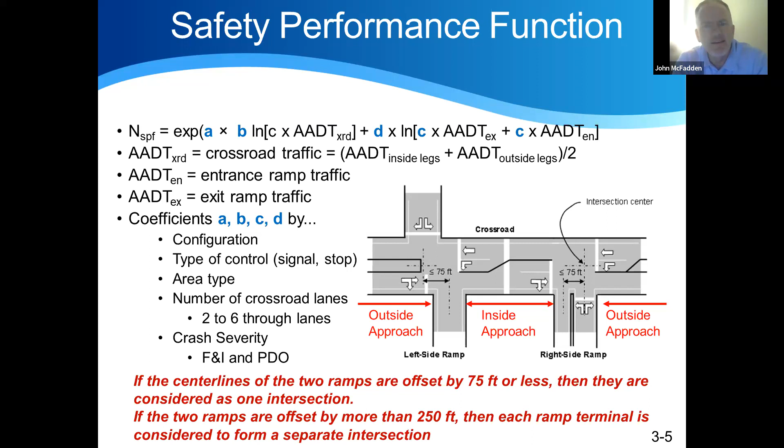Now, thankfully for us, we're not doing this by hand. Let me go back for a moment. But when you get to the Excel spreadsheet, you're going to want to make sure you've selected the appropriate configuration. The key here, because there are so many data elements, is making sure we select the right contextual models for our project. Whether we're dealing with freeways, ramps, ramp junctions, 2-lane rural highways, or multi-lane rural highways, if you don't select the appropriate facility type and contextual model associated with your project, you don't have any chance of getting results that are applicable. This is a challenging thing—explaining variability in crashes using geometric, traffic, and treatment characteristics for a project—so you have to apply the models as they were originally intended.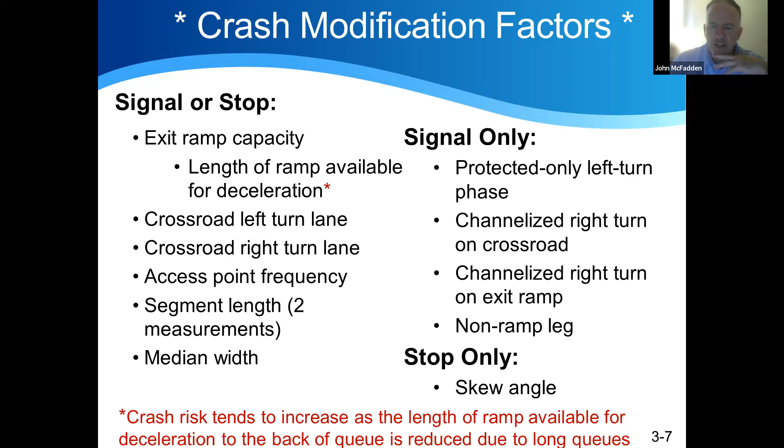Again, continuing with this input data: what type of right turn channelization exists, if any? Left turn bays, width of the left turn bay, right turn bays, driveways and public streets near the terminal within 250 feet, and then traffic volumes on the crossroad as well as the ramps. So these are the data necessary to deploy these methods.

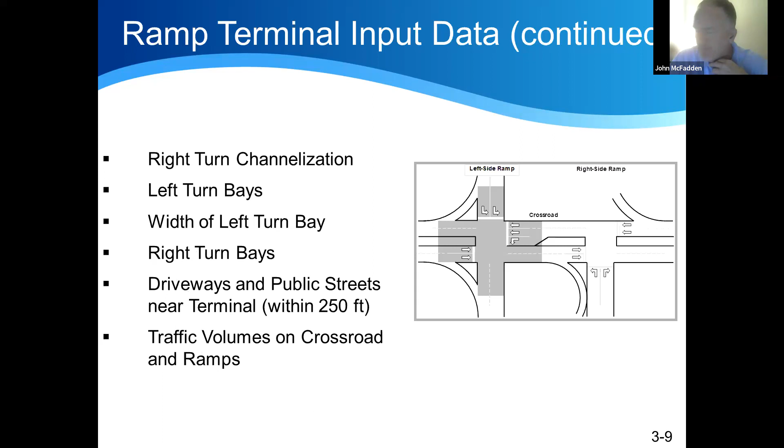Okay, so let's take a look at these data in a little more detail. The number of fully developed lanes at the exit - for this, in order to be a lane, you have to have 100 feet or more in length for that to be added here. So you can see the length of the bay has to be greater than 100 feet.

And in this case, you can see conditions where you have only 2 lanes versus 1 lane. So if you see a split that incorporates a second lane, but the distance for that is less than 100 feet, it is captured and analyzed strictly as 1 lane if that bay length is less than 100 feet.

It doesn't capture it here, but I often think of the unusual scenario - what if it's exactly 100 feet? What do you do then? This is a result of - there's a practical interpretation here where I may look at both ways, or there's a subjectivity to see how it's performing, to see which may be a better approach. But that is very unlikely to occur.

The intersection skew angle is the absolute value of the difference between 90 degrees and the actual intersection angle. So if we were to look at that skew, you can see on the bottom right, we're looking at that 90 degrees and whatever the skew is, the difference between 90 degrees and that actual intersection angle. And then the median width is shown on the top left of this slide.

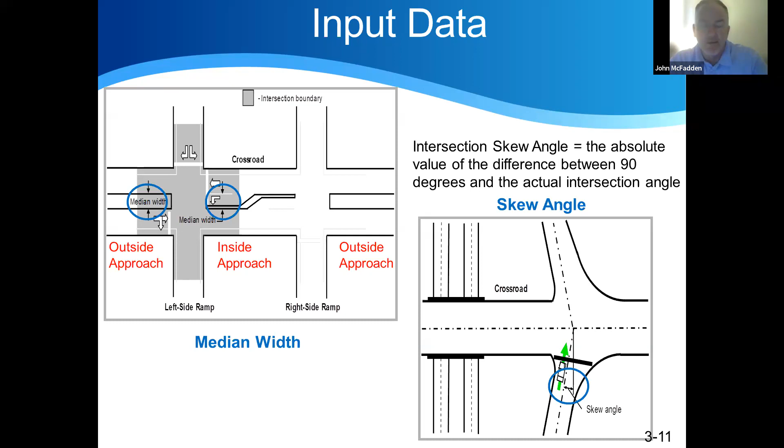So that pretty much captures the content on these ramp terminals. Now I want to segue for a moment back to the spreadsheet, and then I have some other resources I wanted to share with you for the remainder of this morning.

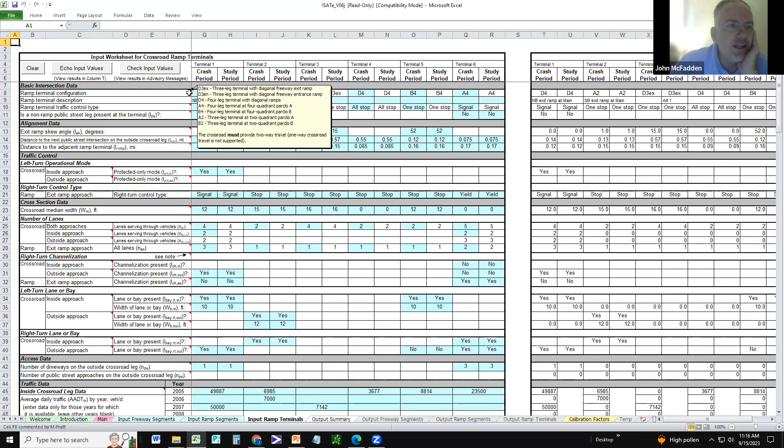So for the tab here, input ramp terminal data - I've clicked on that tab, and what you see again, let me zoom in a bit. Under the basic intersection data, you start to see at the very top the ramp terminal configuration. And if I click on that little, or hover over that little red triangle, you can see the difference in the different ramp terminal configurations.

3-leg terminal with diagonal, 3-leg terminal with diagonal either exit or entrance, 4-leg terminal with diagonal ramps, and then 4-leg parclo A, 4-leg parclo B, 2-quadrant parclo A, 2-quadrant parclo B. And then the crossroad has to provide 2-way travel, so 1-way crossroads are not supported by this.

The ramp terminal is signalized, 1-stop, or all-stop. So there was a question about - I think there was a question on stop condition. I thought I saw here.

Oh, maybe I was dreaming then. All right, never mind.

So those are the traffic control conditions. A non-ramp public street leg present at the terminal - this situation occurs occasionally. When it does, the public street leg is opposite from the one ramp, and the other ramp does not exist or is located at some distance from the subject ramp terminal such that it is not part of the terminal. The most common example is where the public street leg is opposite from the diagonal exit ramp, and if the diagonal exit ramp is present, it's not part of the terminal.

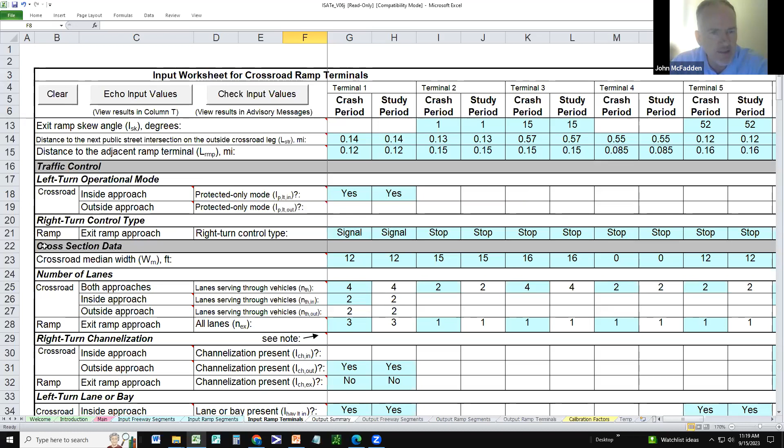The skew angle, traffic control, left turn operational modes, protected or permitted lefts, right turn approach, and the control for the right turns, your cross-sectional data, median width, number of lanes, right turn channelization, left turn bays, access data, number of driveways on the outside crossroad leg within 250 feet of the ramp terminal, and number of public street approaches on the outside crossroad leg term is captured there.

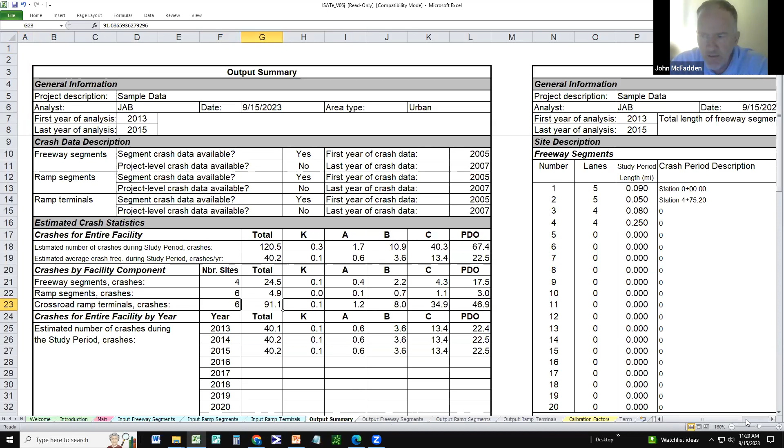So yesterday a question came up related to pedestrians and bicyclists. If you look at the output for these data, we are strictly focused on vehicle-to-vehicle crashes. And here for the ramp terminal, if I zoom in a bit - we are strictly focused on vehicle-to-vehicle collisions.

Oh, that's right, Gary. You had asked about the yield condition for traffic control. Let me go back. So for our traffic control conditions, it doesn't appear that terminal traffic control - you either have, yeah, you might. I'm not sure, Giddy, if this one stop or stop control for the exit ramp captures the scenario you're describing. So I don't think just a yield scenario would come into play.

Note: use one stop for unsignalized D3 entrance configurations with uncontrolled crossroad through movements, because the crossroad left turn must stop to yield to oncoming through vehicles. So I do not believe that we have that capability with these models.

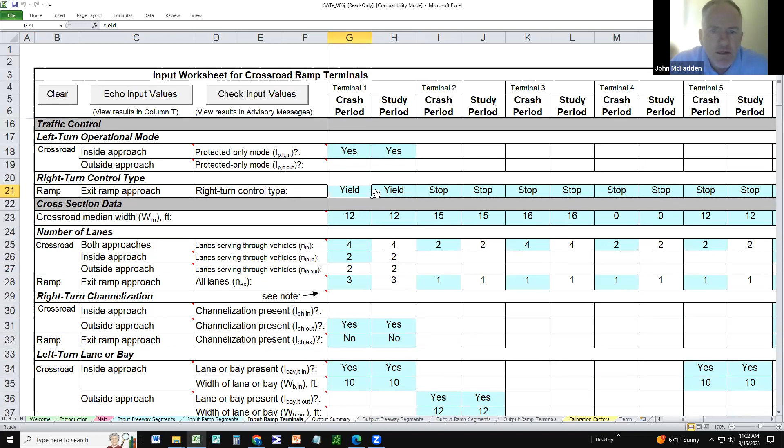Oh, for the right turns. I got you. I don't believe so - I believe that it's strictly right turns, with only two traffic controller conditions, stop or signalized. Oh no, there is yield. Sorry, yeah, they do have yield for the right exit ramp, right turn maneuvers. Is that what you were looking for, Giddy? Yeah, good. I think I just shifted this, so it was stop before.

Okay, and then as you go back to the output summary, you will see here though, at these terminals, compared to the freeway segments and the ramp segments, for the example that we're looking at here, you start to see the total number of crashes over that 3-year period was - or is this annually? Let me see here - freeway segments, number of sites, 4 sites.

You will see a representation at these intersections - you can see a large number of crashes. So this brings up a larger point of unintended consequences. Sometimes when dealing with this, depending upon if you have jurisdictional separation between who's responsible for the freeway and who's responsible for the crossroad, an unintended consequence could be: you address an issue on the freeway segment or the ramp, and it ends up contributing or having a counterintuitive or negative impact at the ramp terminal and the adjacent crossroads connecting into it.

And this is something from a holistic approach that would support the use of IHSDM, because for that crossroad, by adding additional traffic or adjusting something that would influence travel demand on that crossroad, that analysis also needs to be conducted and considered.

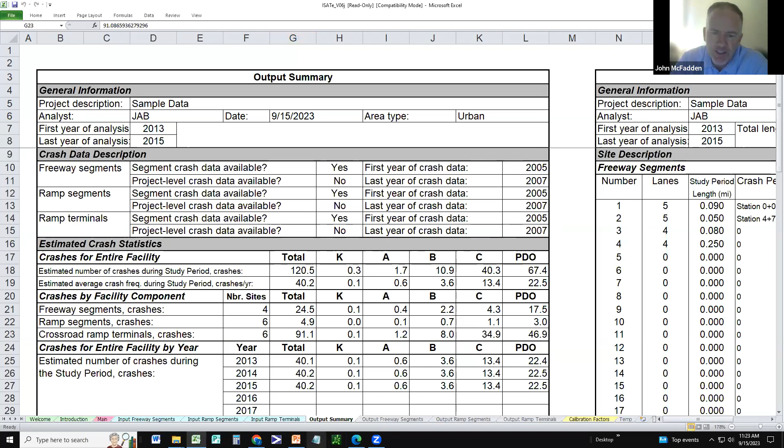And I'll also suggest to you that fundamentally this approach for freeway analysis, ramps, and ramp junctions, of all of the predictive methods, is the one that involves the most data elements. There's more nuance to this than the other sections. The other facility types, I should say, are pretty straightforward in their analysis and the data elements necessary.

Let me just take a moment to illustrate that by opening up the 2-lane rural spreadsheet. So in the 2-lane rural spreadsheet, you're going to be highly - probably taken aback at the contrast from the level of detail associated with the different tabs for the freeways, ramps, ramp junctions, and the corresponding other data elements necessary.

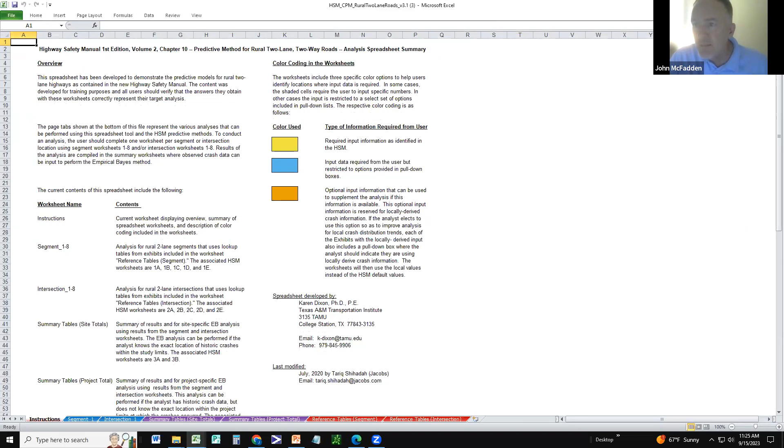And now if I look at, for 2-lane rurals, the corresponding - let me just show you the different tabs that exist here. You have the instructional tab with the data elements and the coding for that, and then you have segments versus intersections, and then summary tables and reference tables. So it's a lot simpler approach.

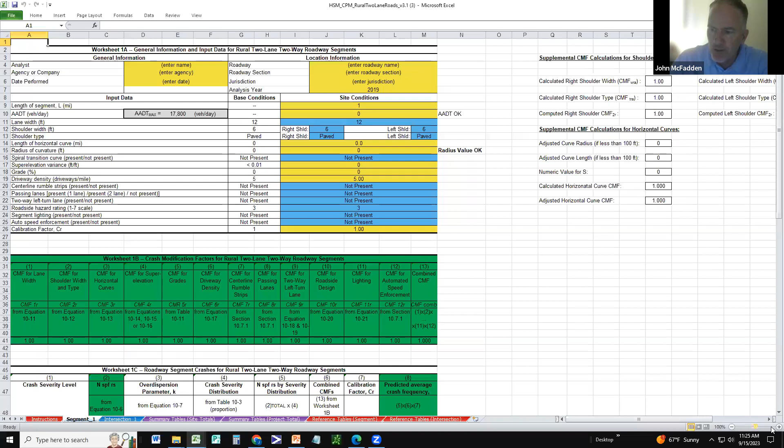And then if we look at the specific data elements necessary to run 2-lane rural highway prediction, you can see they're captured here. There's a handful, 12 or so data elements, starting with the SPF related data, that are the length and ADT. And then here are the adjustment factors, or the CMFs - lane width, shoulder type, horizontal curve rate, grade, driveway density, rumble strip, passing lanes, two-way left turn lanes. So it's a much more simplified procedure when dealing with non-freeways.

So we call this the Red Book report because it's a red book, the red cover. But you can see the publication is from 1999, so hence the spatial and temporal difference. But for instance, for that two-lane rural highway spreadsheet, this would be the reference you'd rely on to apply that methodology.

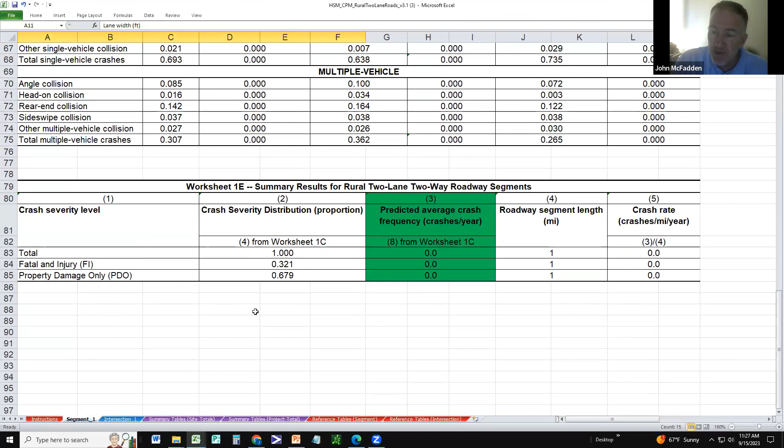Now, it is by nature, in my opinion, a rural two-lane highway—you don't have as much confounding effects in predicting crashes. So they didn't require separation of crashes into different types, meaning multiple vehicle versus single vehicle. They just group them all together under one SPF and predict total crashes. When you get to urban suburban, they subdivide the models and SPFs to predict crashes by type and severity. But for two-lane rurals, this is the simplest of all the Highway Safety Manual predictive methods.

And the other thing I wanted to share, in as much as we just delivered over the last two days an introduction into these Highway Safety Manual predictive methods, there are other resources available. If you look under training on the highwaysafetymanual.org website, we've posted a bunch of training webinars that capture the variety of different applications for Highway Safety Manual deployment. It includes, for non-freeway facilities, IHSDM, new approaches, and a general overview. I encourage you, under this training tab, to take a look if you have any questions, and reach out if you're interested in finding out more.

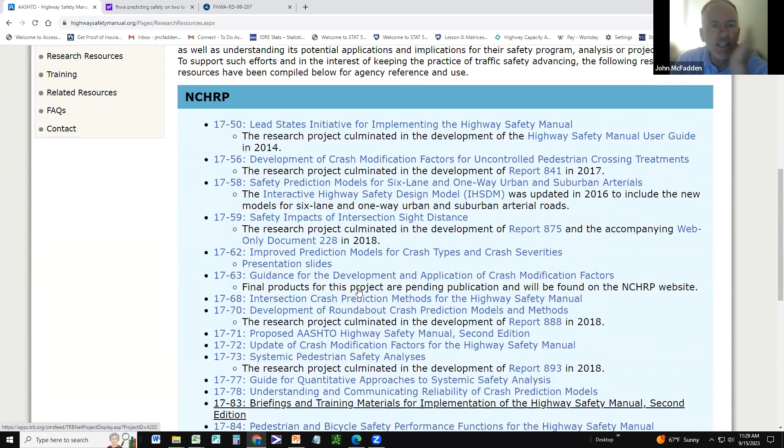And then there's also research resources, and this captures where we're heading, not just now but into the future. These are some of the research reports published since the original 2010 publication that are directly influencing Highway Safety Manual development. In the second edition, a lot of this work will be incorporated, including the NCHRP studies as well as Fed Highway studies. If you're interested in examining other implementation research or reference material, these resources are provided, along with other related resources—I showed you the crash cost for highway safety analysis, the MIRE database, MMUCC and MIRE, and the Crash Data Improvement Technical Assistance Program.

Whatever workshop I give related to data-driven safety analysis, when discussing the Highway Safety Manual and its concepts, I often show this website, and it's a great place to start for trying to wrap your head around what the HSM is, what it's applicable for, how it was developed, and where it's heading into the future. Because this is a living, breathing document—the first edition, as I mentioned yesterday, is our first cut at what we know about explaining variability in crash risk using geometric and traffic-related variables.

It will change. In my opinion, we're going to start to see some drastic improvements, especially in the field of pedestrian and bike crash prediction. Prior to 2010, when the initial edition was developed, the amount of work and data available regarding pedestrian and bike facilities was limited, so we don't have separate safety performance functions for peds and bikes. But since 2010, a lot of effort has gone into collecting that data and modeling it, with subsequent NCHRP studies also published showing those results.